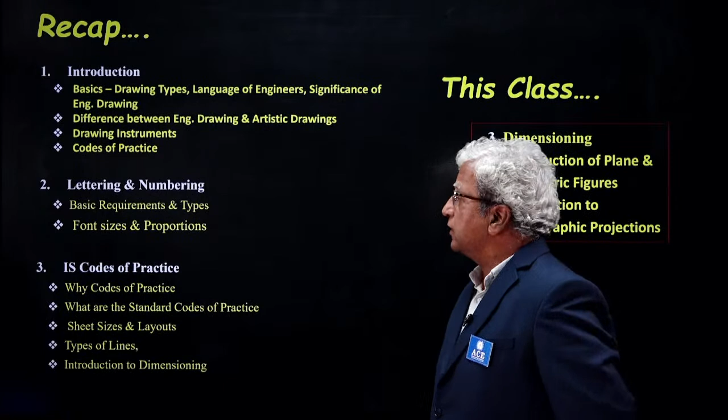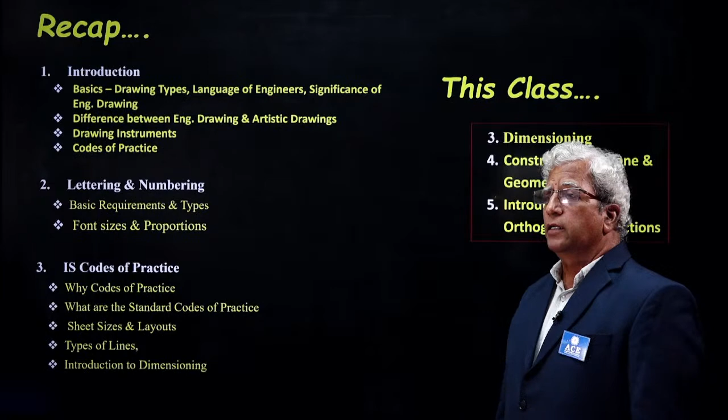This is the second day. Yesterday we had some discussions of the subject. In the introduction component we discussed basics of drawing, the difference between types of drawings like artistic and engineering drawings, and some instruments, codes of practice, lettering and numbering. Now we will go with the codes of practice component, certain things related to dimensioning, and next the construction of plane figures and geometric figures, and based on time available we will try an introduction to orthographic projections. Today we will also discuss certain questions, because at the end of the second day something we would be in a position of having covered something.

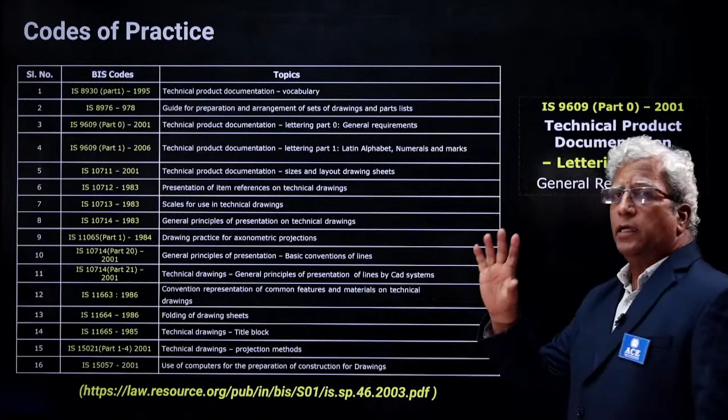Before I go to the actual subject content, yesterday I was expressing doubt about one particular code number, so today I am clarifying that generally we do not expect parts with 0. This is one code where the part is 0, so I was just thinking whether there was a print mistake. It's not so, it was correct, and that code is IS 9609 part 0, 2001. It's about technical product documentation, lettering part 0, and how to document things, general requirements of documentation. All these are available on this website, as I told you.

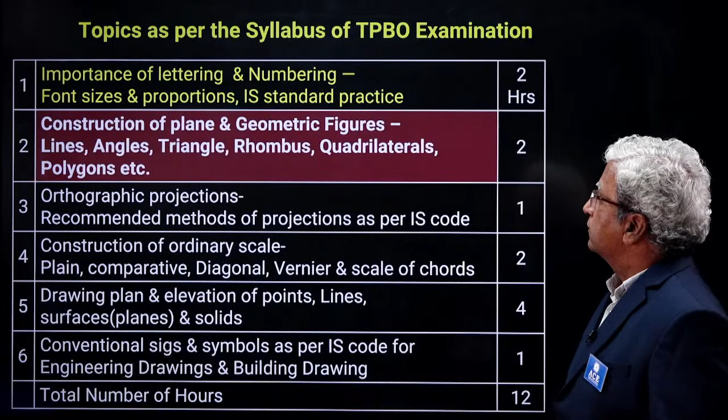Now as per the syllabus, what we have seen so far is at around 1.5 hours we had a discussion. Now we will continue with the same serial order. Today we will be discussing construction of closed figures and polygons and some aspects of orthographic projections.

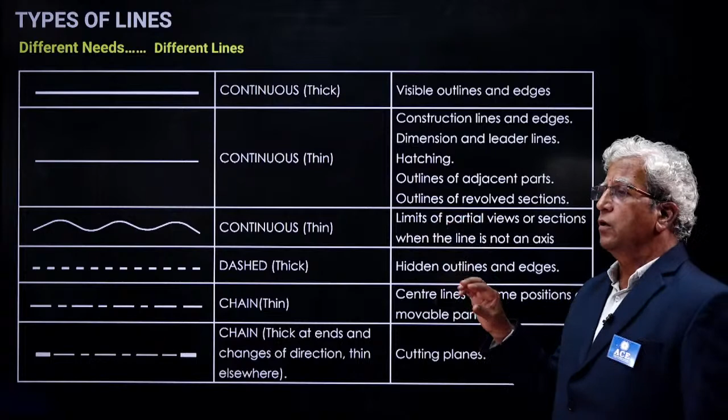As I told you, normally when we make a drawing, as I already told you about the visible edges of a particular drawing, we use continuous thick lines. The majority of the other lines are thin lines. When you start drawing, even if you want to draw a straight line, first we'll draw a thin line.

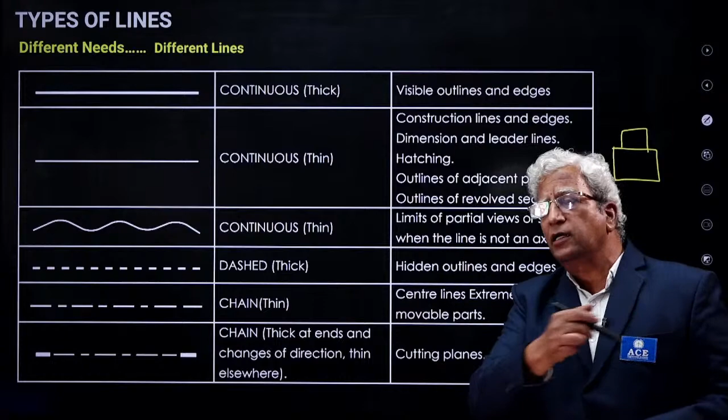On that, mark the distance. So majority of the time we'll be drawing only thin lines, because these thin lines will build the sketch. Later on we'll thicken the required components; other things can be left over if we manage well. Thin lines will be used for many applications like construction lines and edges, dimension and leader lines, hatching, outlines of adjacent parts, outlines of revolved sections. So many examples are there. When dealing with a number of drawings, we will be coming across those lines.

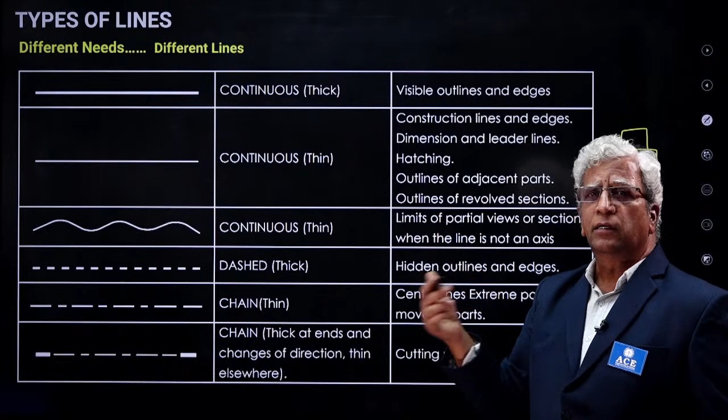So continuous thin line, limits of partial views. Like that, especially as I told you, majority of the time what we use is the continuous thin line.

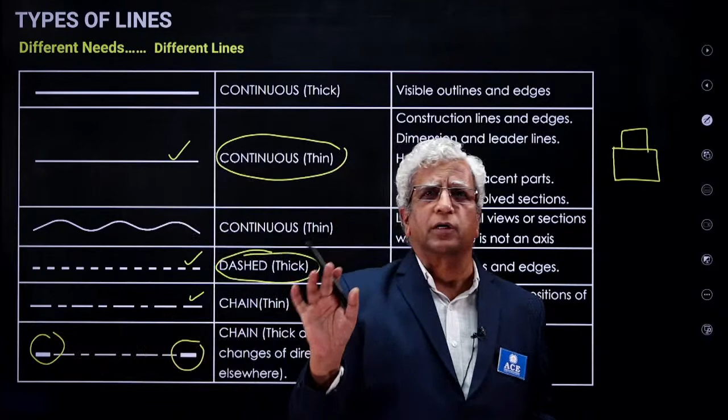Okay, like that, cutting planes etc. We use the same line for cutting line, but with thickened edges. Of course, we don't have sections of solids in our syllabus. If you are drawing sections of solids, you have to represent the section plane by a line, which is same as this line but with thickened edges. That is the section line we call it. So have a proper understanding of different lines.

Now what is dimensioning? First of all, what is the dimension? This is how sometimes in objective questions, if the language is given in a twisted manner, though you know the answer, you cannot properly choose, or it takes more time.

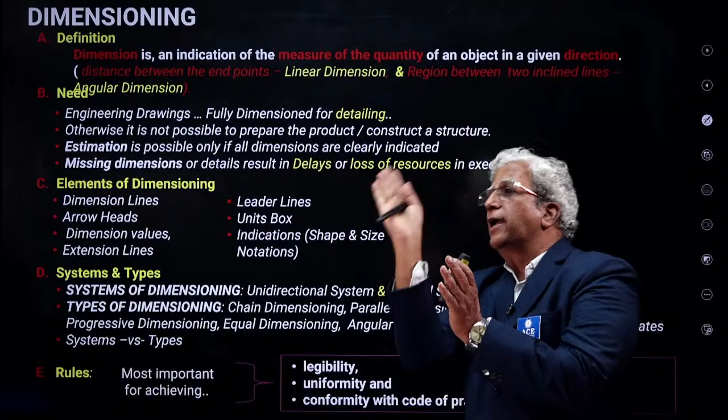So what is the dimension? Dimension is an indication of the measure of quantity. Yes, what is my height? Height is the quantity, how I measure it in terms of some feet or meters or centimeters. So if I want to express the height or length of this object, or the diagonal distance, to express the quantity we use a size indicator, that is what you call dimension. It may be a linear dimension, which is the distance between two points, or an angular space, that's an angular dimension.

And first of all, what is the need?

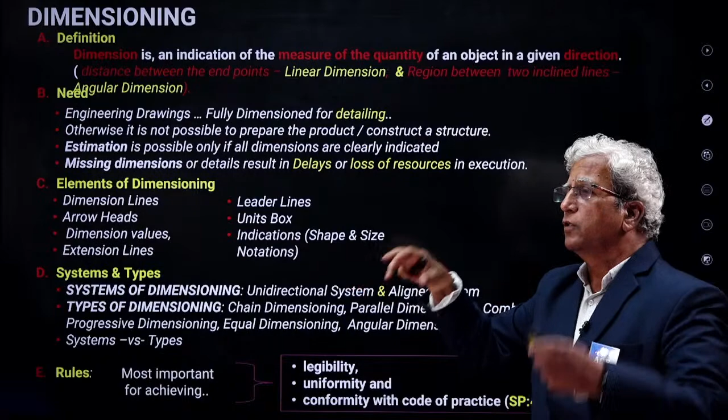Therefore you should have full control over the procedures of dimensioning. So if you want to understand dimensioning, it involves drawing a number of lines and putting some values in a particular way so that everybody will understand. For that purpose, we have to understand what are the elements of this dimensioning.

So what are the elements of dimensioning? There are different elements. First, dimension lines. Each dimension line will have a terminal at which we may put an arrowhead. If not an arrowhead, if you don't have space, we may give a dot or a cross. Even the arrowhead may be open like this, or a closed head like this. So different ways - dimension lines go with arrowheads at the ends.

Then dimension value - if this length is measured, what is its value? Say 42 millimeters, that value is the dimension value. And then extension line.

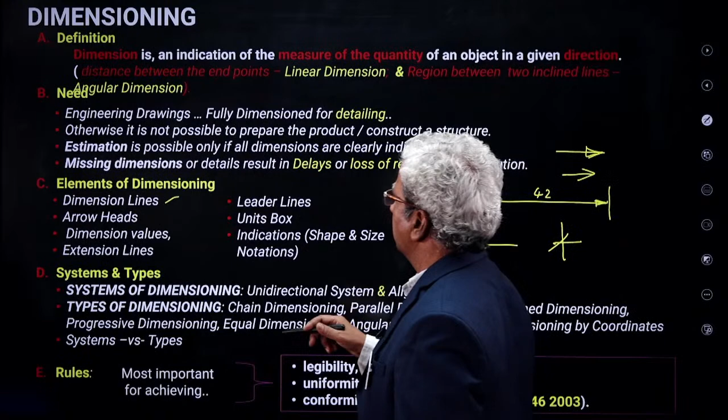How you mark the dimension line, I'll explain so you know the quick way of thinking while writing the examination - you should know certain wordings so that in the options you can quickly select the particular answer. So, extension lines - when you are putting the arrowheads at the end of the dimension, that is at the terminals, that point is connected to the object through lines which are extended from the object to the dimension line. In the sketch you will see it better - these are the extension lines.

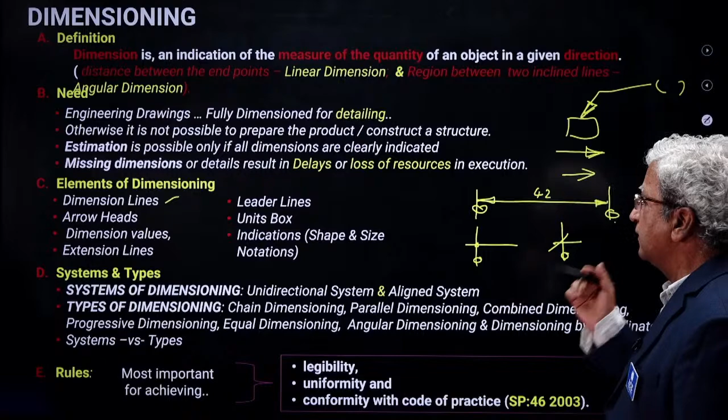Similarly, there will be several types of dimensioning: chain dimensioning, parallel dimensioning, combined dimensioning, progressive dimensioning, equal dimensioning, angular dimensioning, and dimensioning by coordinates, around 7 types. So systems versus types also you should have a complete command.

Some options may be given where they ask: this is not one of the systems of dimensioning. In the list, he will give all the types except one, or in the types he may put one system, and then ask you: this is not a type of dimensioning.

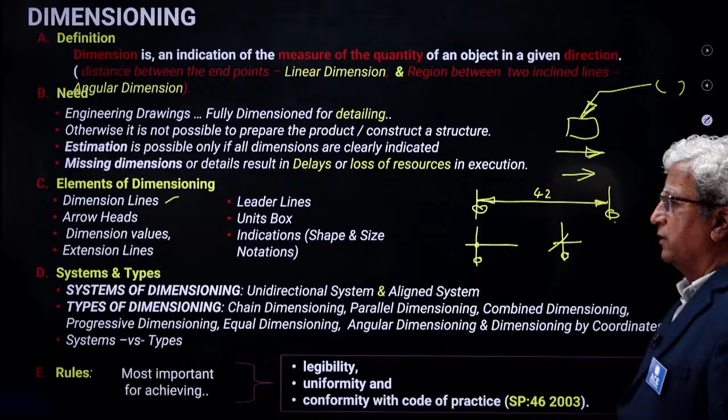We'll go through that. Okay, but what are the rules of dimensioning? Yes, a well-dimensioned drawing will be quickly read and quickly interpreted by the users.

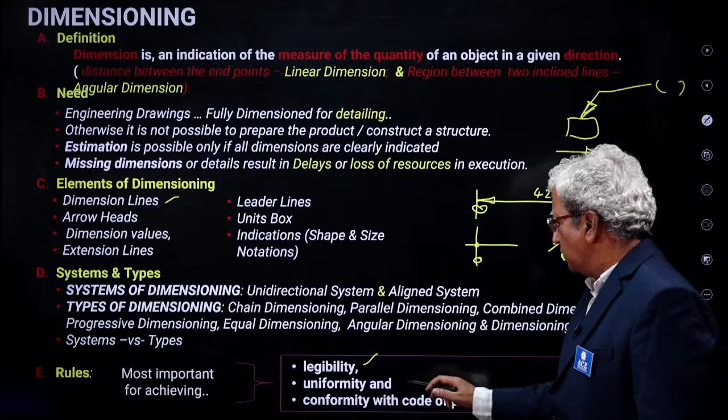So most important for achieving good dimensioning, you need to achieve legibility, uniformity and conformity with the code of practice. That is SP 46 which speaks about all these things. So we'll see what are those things.

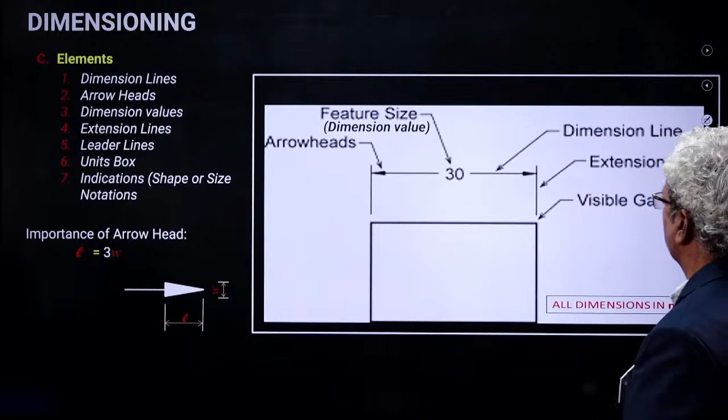Right. So what are these things? You can see what are the dimension lines. Are there any dimension lines in this?

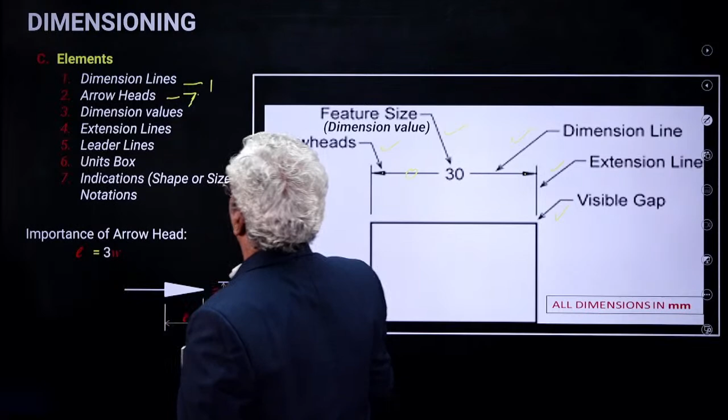7 arrowheads. And dimension values, only one dimension line, hence only one value we can have. You can see, right? Only one value we have, one dimension value visible here.

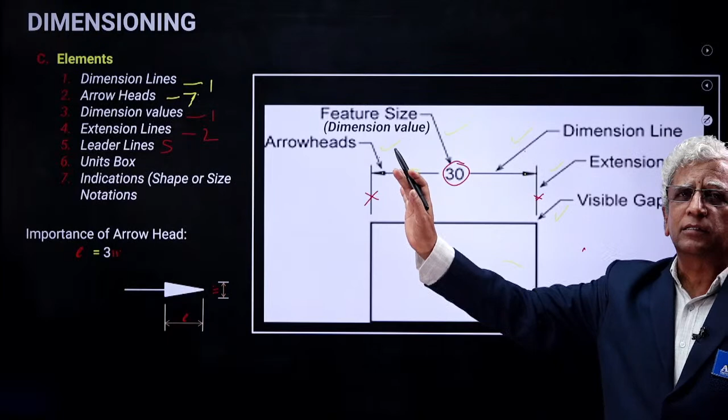We will not repeat the dimensions. All dimensions should be in one common unit only. Therefore we will show that unit in the box.

Okay, that is the units box. Okay, see all dimensions in millimeters. Is it not so? Okay, all dimensions in millimeters. This is called unit box.

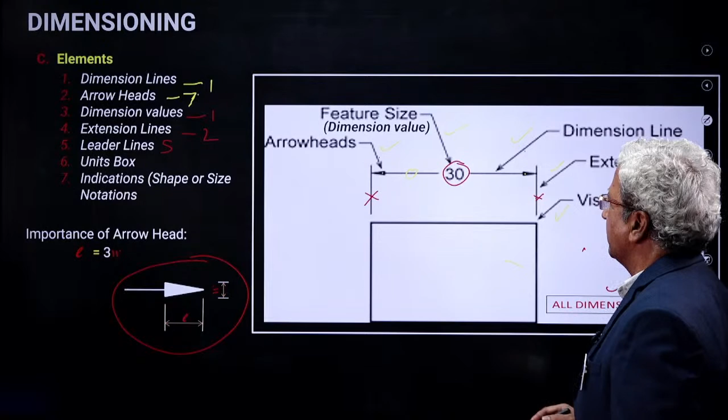to draw it like that. Here I am just showing on the same sketch. Many students complain that, sir, I am not getting it like that. So the best way is: don't end the arrowhead here. End the arrowhead a little bit away.

Try to take it like this, then you will be able to get lengthy arrowheads. Students often complain they could not follow, so the best way is not to end the arrow here but connect a little bit away from the extension line. If you start this way, you'll solve the problem. This is one technique. Okay, anyway, now these are the arrowheads.

There are different types of arrowheads for different contexts. You can see arrowheads and positioning of a dimension line, how you have to position the dimension. These are all the rules of dimensioning.

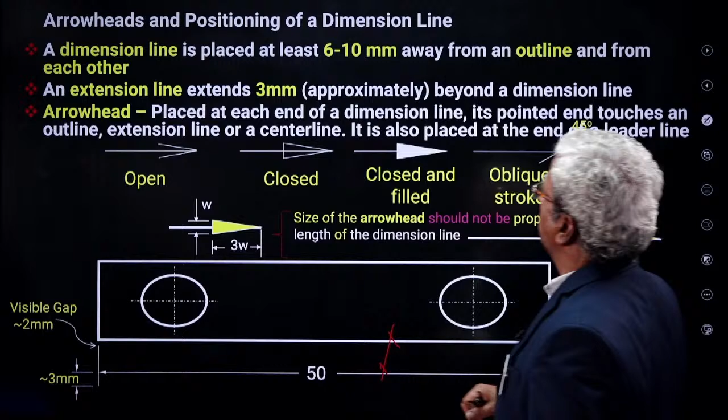For example, see here, these are the two things. You are able to see this, I hope. So this is the object, this is the extension line.

The extension line starts with a visible gap of around 2 millimeters. Similarly, where should the extension line go beyond the dimension line? For a distance of around 3 millimeters. So we should not draw it just like this.

You should not end like this - it needs to be a little bit more. Similarly, you should not end like that. If there is an object like that, you should not connect the extension line with the object. There should be a visible gap between the object and the extension line. These are all the rules of dimensioning.

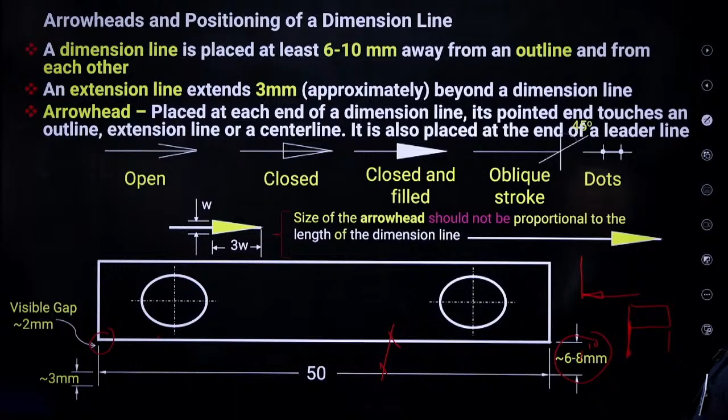How to place the arrowhead - its pointed end touches an outline or extension line. Sometimes you may not be able to draw the extension; sometimes you start the dimension from the object itself, as it's required. In such situations, for example, if I don't have space here to give a dimension, I may start from this point itself.

So what are the types of arrowheads? Open type, closed type, closed and filled type. If there is no space, you go with a 45 degree slant line at the intersection of the dimension line and extension line. Even for small dimensions like 2mm or 5mm, you show them through dots. So there are several ways of representing dimensions, arrowheads, etc.

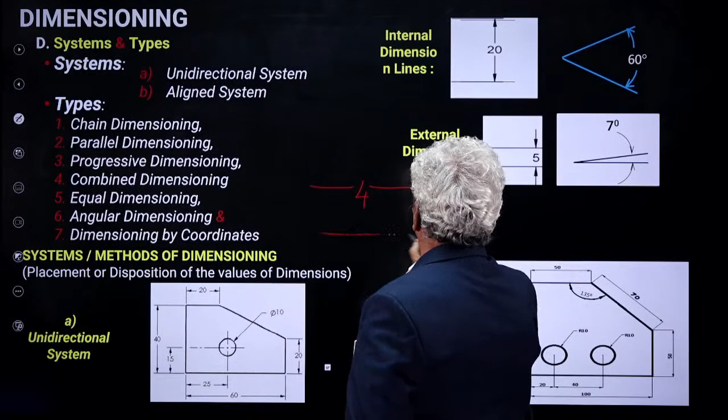Now you can see systems and types. First we will discuss systems of dimensioning, then types of dimensioning. What are the systems of dimensioning? The way in which you place the values, there are two ways you can put it: you can give a break in the dimension line and put the value, or you can directly put the value on the dimension line. Accordingly, we have systems.

If you put a break and put the value in the middle, it is called the unidirectional system. If you put it on the line, it is called the aligned system. In these cases, regardless of the direction of the dimension line, the fonts are always written horizontally.

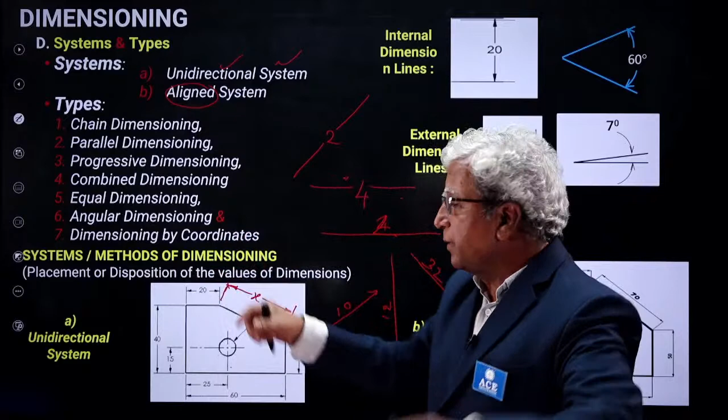It is on the line, not above the line. Sometimes people may call it on the line but with a break. So it is broken and written, whether the line is this way or that way. Similarly, if there is a dimension line to be written here, how do we write? We put and write some value x in that direction. So this is unidirectional - why is it unidirectional? Always horizontal and then with a break, clear. Then here, if it is a circle, you put a diameter here.

There may be external dimension, internal dimension, that also I will tell you. So even angular, it is an angle - this angle is measured with a break here. If it is internal, external, sometimes we don't have space. In that case we put it like this - there are two external dimension lines, and in between you put the value.

Even for angular, we will put like this. If there is no space here, we put here - that is this thing.

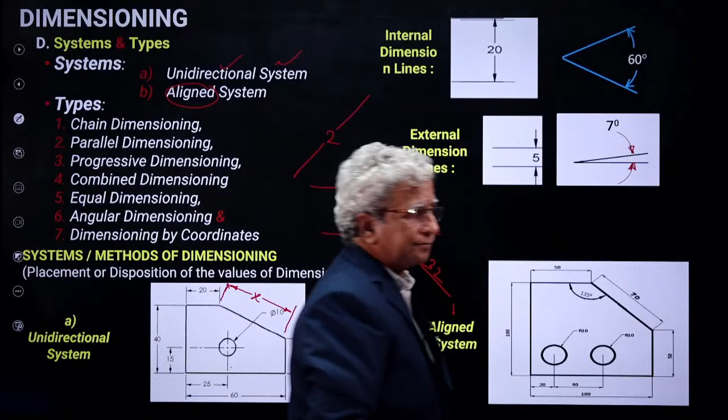And in the aligned system, now you can see what is the way in which it is kept. You can see there are 1, 2, 3, 4 horizontal dimension lines. For them, without a break, we kept the values like this, above the lines - continuously drawn. But here you can see there is a vertical line here, there is a vertical line here.

In this vertical, from bottom to top, 100 - how is it written? Similarly it is vertical, bottom to top it is written. Similarly for a slant line, as I told you here.

Unidirectional - so if it is unidirectional, we will put horizontally. Now it is aligned, so on this, you are able to see, right? On this you will have above that, in that direction we will put. Same thing if it is unidirectional, how do we put that? Horizontally we write with a break. That is the difference between unidirectional and aligned system - this is aligned system, this is unidirectional system.

Similarly, the angular value, you see, on that we put. If the same thing is unidirectional, what do we put? If some angle has to be written like this, 130 degrees - horizontally we write with a break, this is unidirectional.

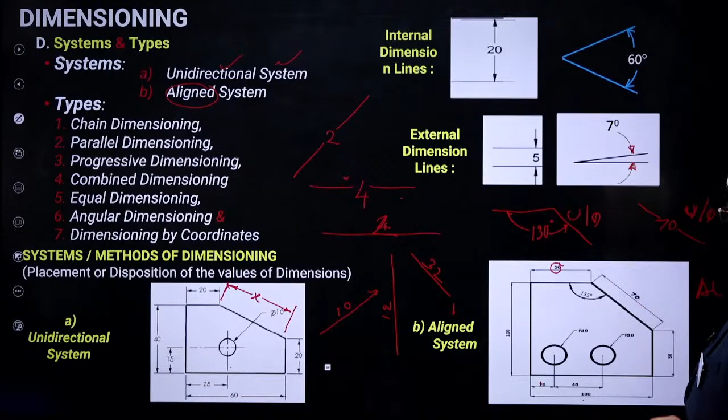So like that you can see different ways of dimensioning. And if it is an external dimension in the aligned system, suppose a small distance is there like this, we will continue the line and put this value here - you write here 2 like this. If there is no space, you place it in the side in that same direction. This is external dimension. Even for angular dimension, same way.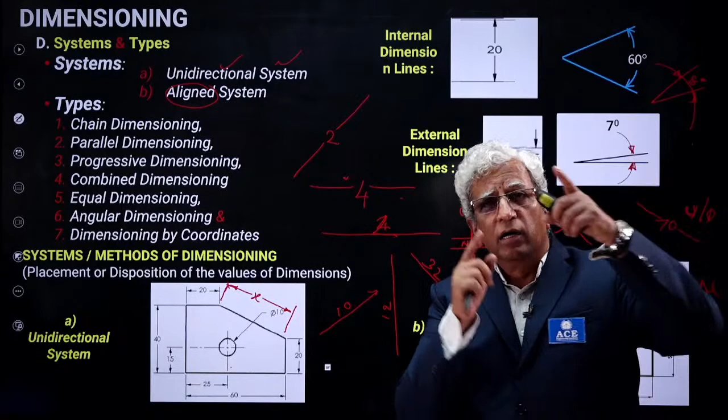Here if it is a small angular dimension, you continue the arrow like this and put on that, say 18 degrees like this, on that you put like that. Okay, this is how you can understand the difference between unidirectional and aligned. So in the unidirectional system, all values are written horizontally with a break in the dimension line. In the aligned system, all values are written above the line without a break, whether it is internal or external, whether it is angular or linear.

So with these examples, we can see a number of sketches showing those examples. Okay, one more slide - somehow I don't know, it's missing.

Okay, now the types of dimensioning. We have seen systems, now types. What are the types of dimensioning? As I told you, for different reasons, different contexts, we have different types suited to different needs.

Have a cursory look at all these types first. The name itself suggests you need not memorize anything. The name itself tells the layout. You see that? Please observe, all of you.

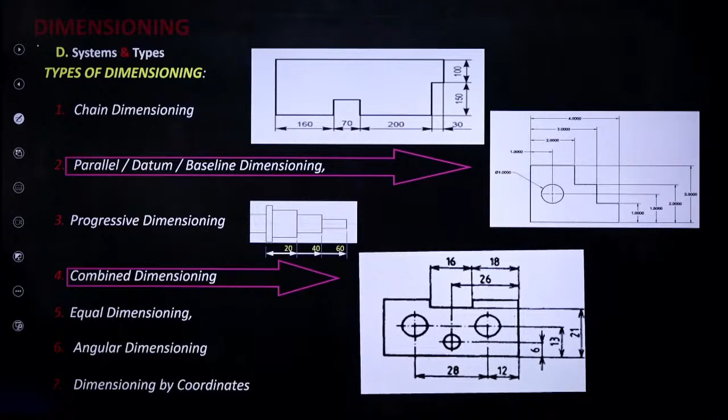Okay, chain dimensioning, you see. Suppose all the dimensions of the object are such that they can all be written only along a single line, or all the dimension lines are in a single line, then you go with chain dimensioning. You see, it's like a chain. All the dimension lines are in a series, one next to the other along a length. That is chain dimensioning. This is horizontal here, vertical also like this.

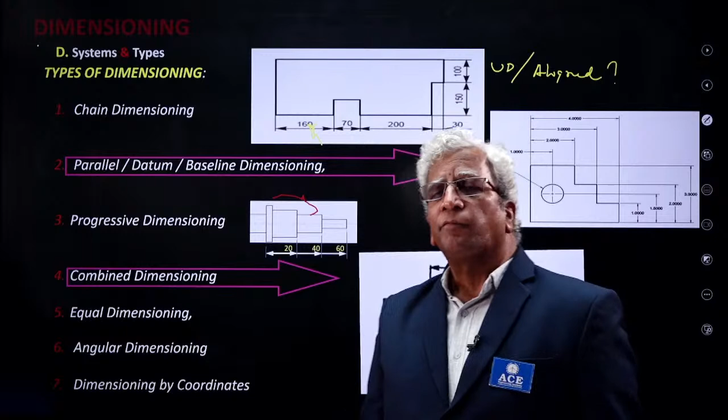Then parallel dimensioning, or datum, or baseline dimensioning. All dimensions start from one point. In that case, it is called parallel dimensioning. For example, all measurements are marked from the same common point for marking convenience. See here, all the dimensions are given like this. All dimensions start from a common line, here horizontal, here vertical.

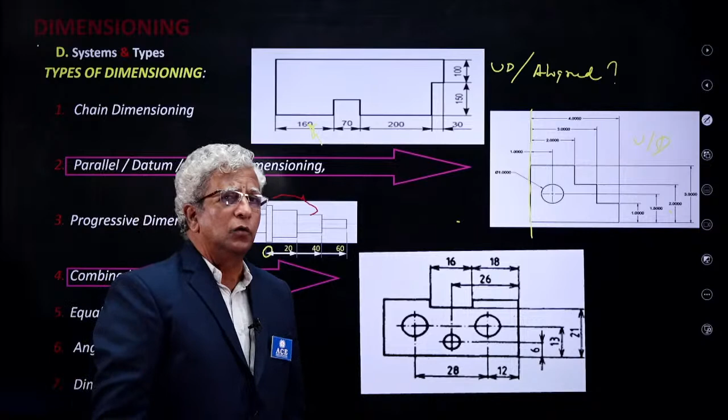Combined dimensioning, of course equal dimensioning - same sketch, it will come because of the space. You can understand if there are repeated values, for example here I will show you some repeated values are there. All values are same.

In that case, just to give better readability, we put this. Here we put some dimensions, say 25. Same value is there, so you put 'is equal to'. Instead of writing 25 a number of times, we will just put equal to. That means all the dimensions are same. So that type of dimensioning is called equal dimensioning, and this is only to raise the understanding level.

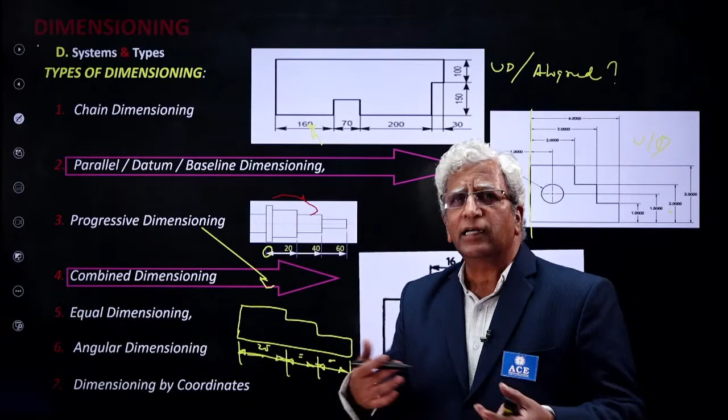So for quick readability, see, different contexts, different types have evolved like that. So you can see equal dimensioning, that is the example, okay. And then the other - in the next slide - the angular dimensions in both the systems, and the coordinate dimensioning. Angular dimensioning means you are showing the angles.

You are showing the angles. If it is a unidirectional system, all the angles are shown by giving a break on the arc. This arc should be drawn such that when you are showing the angle between two lines, these lines will intersect at a point. For example, there are a number of radial lines here, all intersecting at this point.

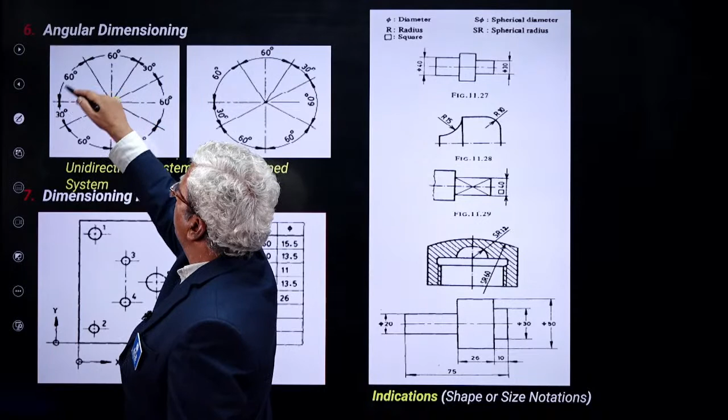So different angles are shown, but because it is a unidirectional system, all the values are written horizontally, whereas the same angular dimensions, if you want to show in the aligned system, you can see along this, along this, along this, above the line. See the difference between this and this, okay? Above line, above line. Similarly this and this. So like that, there are several examples you can see.

For this direction, I am putting 60 degrees in this way. For this direction, I am putting 30 degrees in this way. Again, these two you see - clockwise, anti-clockwise directions. Like that, that system is our aligned system, okay.

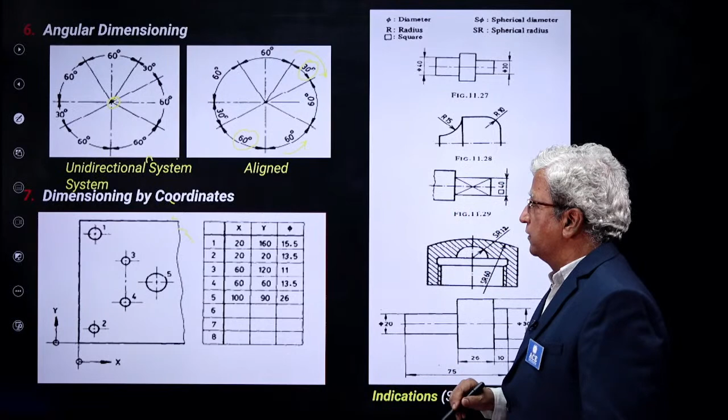And then here, dimensioning by coordinates - this is good for our CAD/CAM jobs, for easily feeding things. You know what are coordinates? We take a reference point, an origin point, so that we establish an x-axis and a y-axis. The two coordinate axes, is it not so? Horizontal x-axis, vertical y-axis, right? With reference to those coordinate axes, with the origin as the reference point for measurement, we'll locate different objects in the drawing.

For example, there are some boreholes on this plate drilled with different numbers, and their diameters are also different. Accordingly, we'll give numbers for those objects. For each number, we'll give its x coordinate and y coordinate. For example, number 3 is here. For number 3, its x coordinate is 60, means what? From this vertical line, the distance up to this point, that is 60. Similarly, that is the x value.

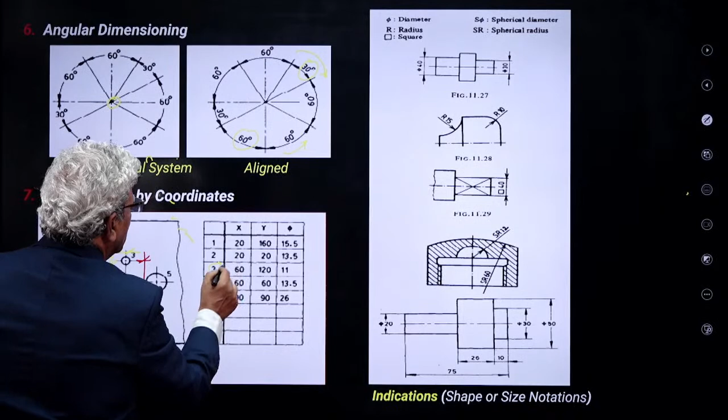Similarly, the y coordinate for this point is from here, this height. Y coordinate is how much? 120. Now you understand? This is all, it's not a big new thing, everyone can understand well. So we will need a table of coordinates to accompany the drawing. Without this table of coordinates and designation, you cannot give that, okay? For CAD/CAM work and such things, this is suitable.

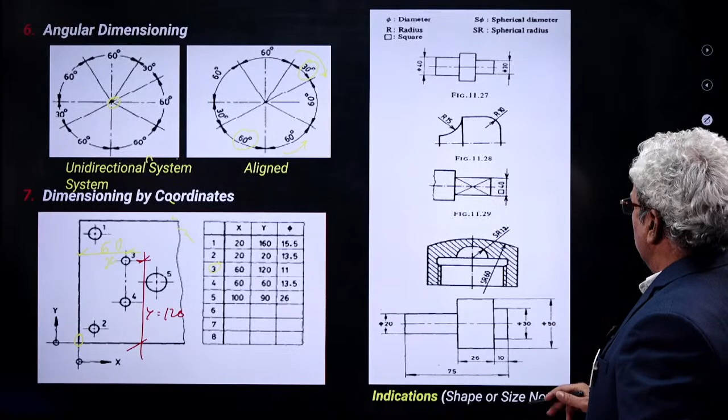So we have seen some 7 types of dimensioning and 2 systems of dimensioning, and before we go to the next chapter, we'll see this and have a small break. What is that? Indications - that is shape or size notations. See, dimensioning is to give quick readability for better understanding with the least number of values, etc. For that, these things were given by the code.

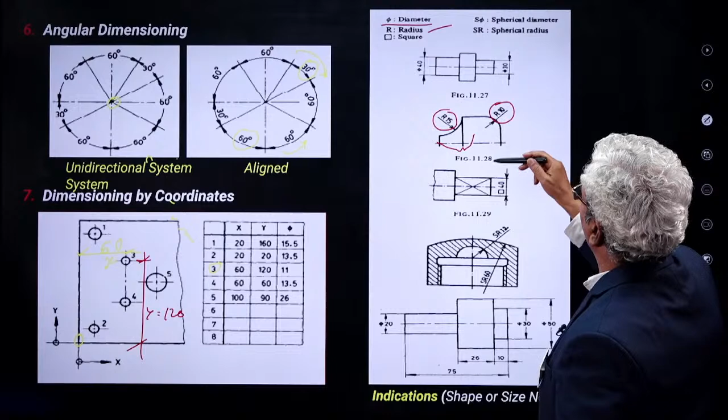What are they? You can see it is written R15, R10 - that means what? Radius value 10. You see, R tells what - Radius. Similarly, phi tells what - Diameter, okay, phi is diameter. Where is phi? You can see some diameter. Yes, phi - see, phi 30, phi 40.

So you should write like phi 50. That is correct. But if you write 50 dia, we may say it, but we should not write like that. We should write like this - we should not write like this. We may call it that way, that's a different issue. But we should always put the diameter symbol or radius symbol first and then put the numerical value. This may be a big question.

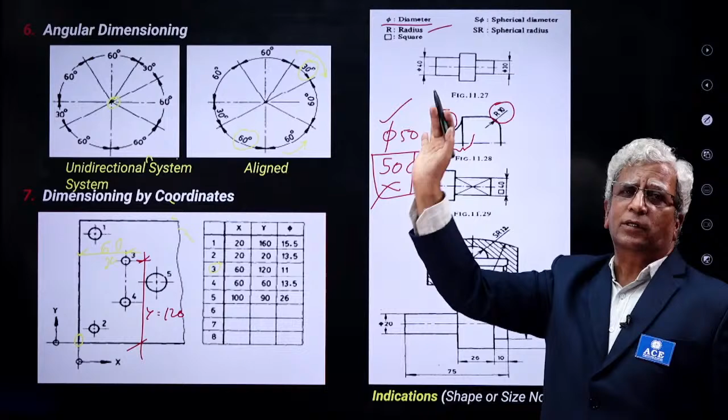That's about diameter and radius. Similarly for square, some shape, for example here it is shown for this part, some 40 square. The rule is: numerical value preceded by the symbol, or symbol followed by the dimension numerical value. So this tells that if you see from this direction, the shape will look like this, whereas from this direction, this is a circular one.

Here dia 30 means this object is something like a rod. Similarly, from this side I will show you, this object is something like this. So diameters in one elevation or plan give us only 2 dimensions, not 3 dimensions. Such things you can see like that. Similarly, radius, and then radius square we have seen.

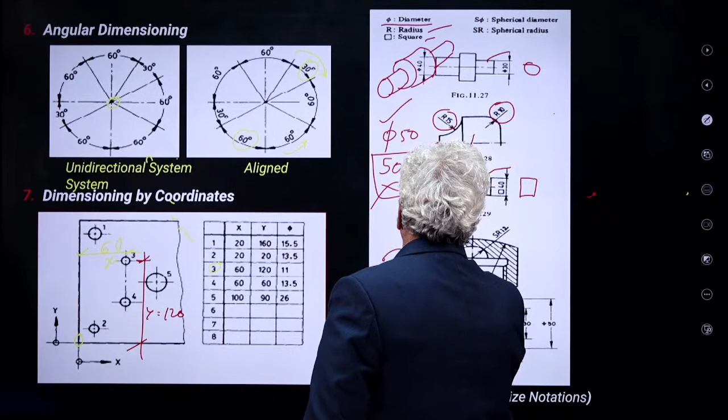Now, spherical diameter and spherical radius. The symbols are S phi and SR. For example, here it is written. Here is spherical radius, and this is spherical radius, meaning inside it is not a cylindrical hole, it is like a spherical hole. So if you cut like this, the hole will also be like this. The object will be like this. Whereas if you cut like this and see in this direction, you will have like that.

Suppose this is a cylindrical one - spherical diameter, spherical radius - whereas if it is cylindrical, if you cut like this and see, you will see the drawing in this form. Because it is spherical all round, if you cut here and see, you will see another same radius. If it is a cylindrical one, you don't show like that, you simply say radius. In that case, the continuous drill hole will be like that. If you see in side cross section, you will have that. So similarly, spherical radius or spherical diameter - these are the symbols.

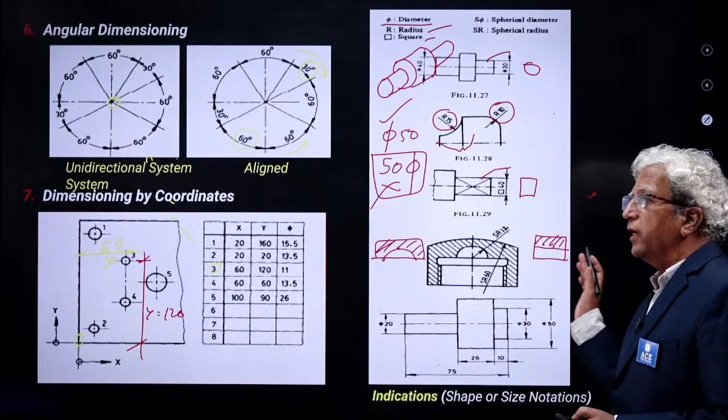Similarly, there are other indicators like tolerances, finishes, etc., but we cannot go on explaining every code. So this is how you can understand different aspects of dimensioning, wherein we have studied the different systems of dimensioning and types of dimensioning, in which for different contexts different types have evolved. If you understand in what context what is useful, you can easily remember. So if questions are there, you have to understand how the question describes the context, and accordingly think and say what type of dimensioning it is. Or if the sketch is given, you can easily identify that.

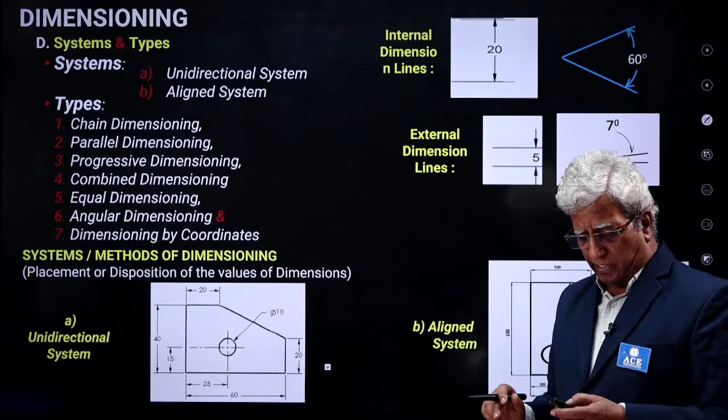Next we will be discussing about lines and planes. Construction of geometry figures - this we will discuss after a 5 minute break. Thank you.

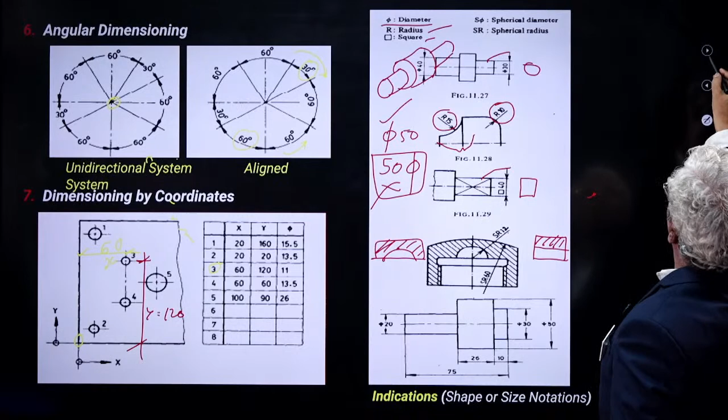Construction of geometric figures. What is a geometric figure? If you can define its boundaries in a proper way, that's a geometric figure. There are certain entities like a point, line, and plane, solid, and so on. A point is a single location entity. A line is a length joining two points. Similarly, if there is a region bounded by certain lines, it's a closed figure. But instead of showing in a haphazard manner, if we can show it in a regular way with certain interrelationship between the boundaries, that's a regular figure.

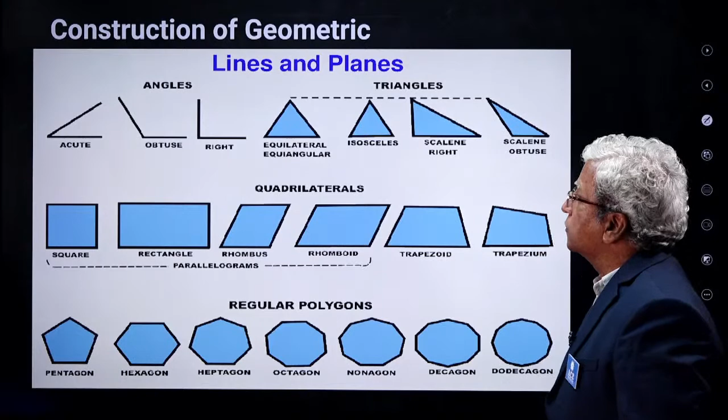All of us know these things - for example, here there are three regions shown, bounded by two lines. This region is one thing, this region is another, and this space is another. Here these regions are bound by two lines - such a situation we call an angle. Here, this line is inclined at 90 degrees, so it's a right angle.

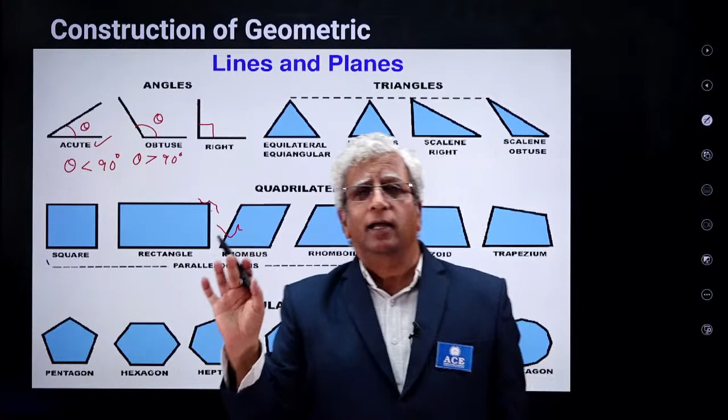If some angle theta is more than 90 degrees, we call it obtuse angle. If that value of theta is less than 90 degrees, it is called acute angle. There are other things also, but we generally only discuss these. There are other terms like zero angle - if these two lines coincide, if I go on reducing this value theta to 0, both lines coincide, so it's called a zero angle.

Similarly, if I go on raising this value, this line will be in line with that, and this becomes 180 degrees. If I go on increasing this value to 180 degrees, in line with that, then it is a straight angle. Right angle is 90 degrees, zero angle is 0, and straight angle is 180 degrees.

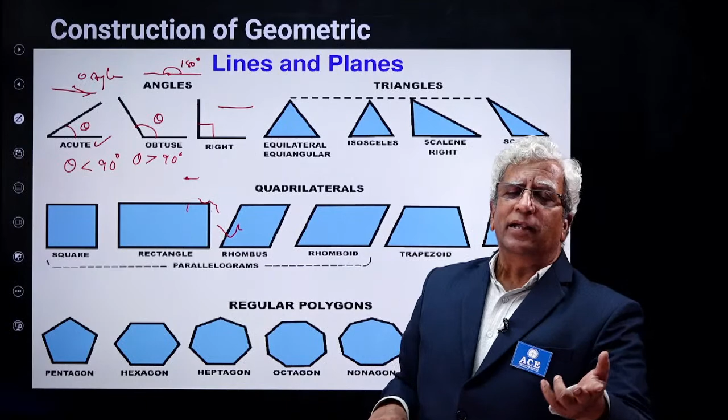So like that. Similarly, there are other terms like supplementary angle and complementary angle, something which is part of 90 degrees. There are so many other things, but anyway, let us finish quickly. Today we have to also discuss some questions.

These are all plane figures. Right from school days you are learning, there is nothing new for you, just for exam point of view, a small brushing, refreshing knowledge with certain exam point of view discussions. So what is an equilateral triangle? These are all triangles, right? What are the types? A scalene triangle - scalene means the three sides are not equal, hence three angles are not equal.

If one of the angles is 90 degrees, then it is a right angle triangle. Similarly, if all the sides are equal, it is equilateral triangle. If only two sides are equal, then it is isosceles triangle. So an isosceles triangle will have one axis of symmetry. An equilateral triangle will have 3 axes of symmetry. This we discussed, you remember? Whereas these triangles do not have any axis of symmetry unless some 2 sides are equal, then it becomes again isosceles triangle.

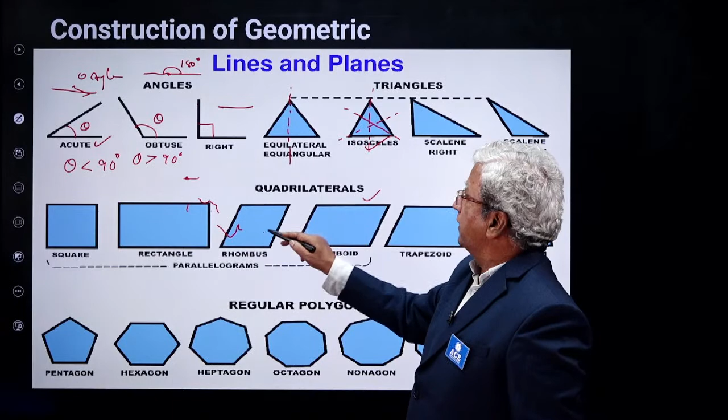But they are all under the class of parallelograms. Generally, we used to call only this as parallelogram in the school level. But for the parallelogram, if all the sides are equal, that becomes rhombus. And for the rhombus, if all the angles are equal, it is the square. And for the rhomboid, if angles are equal, then 2 opposite sides are equal individually, that becomes a rectangle. Thus, a rhomboid can be described with certain conditions either as a rhombus or a rectangle or a square.

So on this you may have questions. Individually you may know, but how to describe it with conditions, right? And one important property is here, if you see the diagonals, only for 2 things the diagonals intersect at right angles, 90 degrees. What are those 2? See, the square - for the square, the diagonals intersect at right angles. Similarly, for the rhombus also, the diagonals intersect at right angles. This is one of the questions in the recent examinations.

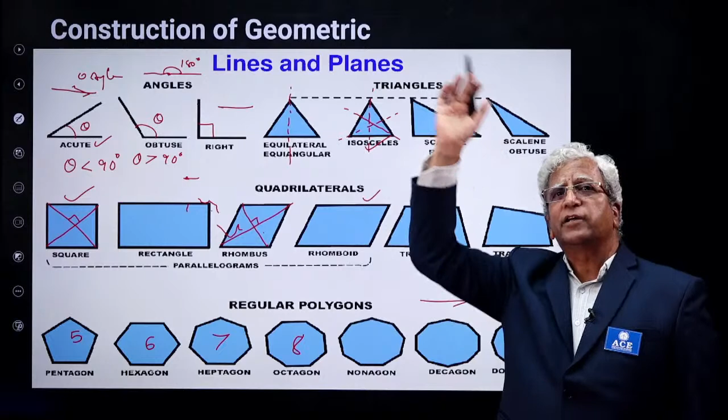Among the closed figures, if this number goes to infinity, what is the result? The result is a circle. So the circle can be viewed or expressed as a polygon with infinite number of sides and also infinite number of axes of symmetry. And what about the axis of symmetry for these things? Whatever is the number of sides is the number of corners, so same is the axis of symmetry.

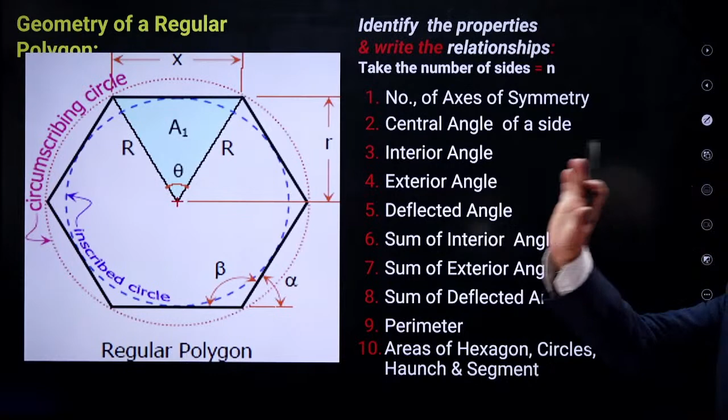Now, this is one particular slide wherein you can comfortably answer so many questions, or expect so many questions, if the topic is classified as per our syllabus as geometric construction of geometric figures. Now what I have shown here, you can see, is a regular polygon, that is a hexagon.

It is a hexagon. Now this hexagon, because the number of sides is 6, is called a hexagon.

Identify the properties and write the relationships. Take the number of sides as n. See, hexagon I am showing you as an example to describe the regular polygons and their properties. So what are those things we will start with? You can see here what is the sketch. Let me first describe you. I have drawn a regular hexagon.

Then, with that regular hexagon, I have drawn two circles. One is an internal circle which is tangential to the sides. You know the meaning of tangent, right? So this internal circle is tangential to the sides.

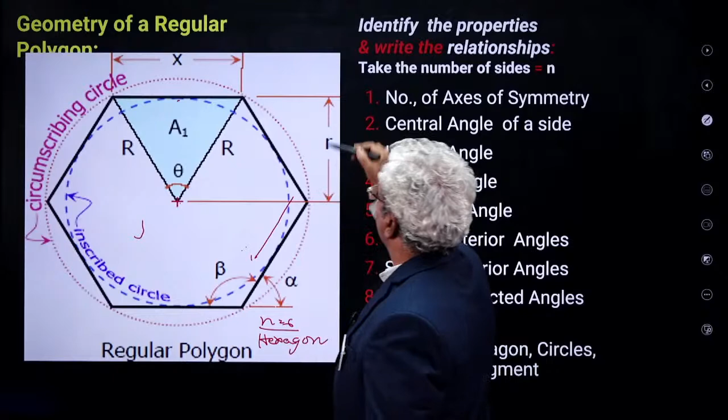It is circumscribing, it is above the hexagon, so it is called the circumscribing circle. Whereas if you see the distance from the center to the midpoint, this distance, small r, this blue color circle, it is inside the polygon, in this case the hexagon. That circle is the inscribed circle. So there is an inscribed circle and there is another circumscribed circle.

Now, let us see the properties. What is the number of axes of symmetry? In this case, n here is 6.

Then the central angle of the side. What is the central angle of the side? The side makes an angle at the center, that is theta. That theta becomes how many? If there are n sides, all the sides, each side will make an angle theta there, is it not so? So that theta, like that, 6 sides together will cover all the central angles together. Therefore, there are 6 thetas here, and this total becomes 360 degrees.

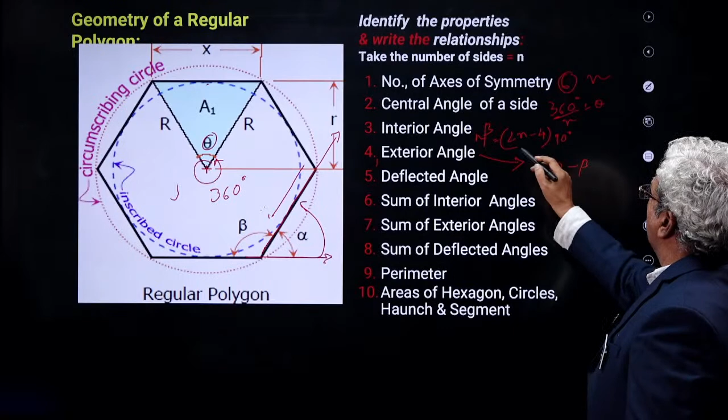So sum of interior angles is 2n minus 4 into 90 degrees. You will get that. Similarly, exterior angles, 2n plus 4 into 90 degrees.

Deflected angles: see, all these lines come back to same position. Therefore, 360 degrees. Alpha becomes all the alpha, that is sum of deflected angles. N into alpha is nothing but n into theta. So alpha and theta are same, value wise they are same.

For example, hexagon, you see, we will know that for hexagon this is 60 degrees. This is also 60 degrees, is it not so? Therefore 180 minus 60, this is 120 degrees. So you can just try like that, you will get all those things.

Similarly, perimeter. How you get perimeter? If the length of the side is, say, x. What is perimeter? N into x is perimeter.

Areas of the hexagon, circle, haunch and segment. There are terms like haunch and segment. You can get them, I will explain to you here. For example, area of the hexagon - how you get the area of the hexagon? If you know the area of one triangle, into n, you will get area of the polygon.

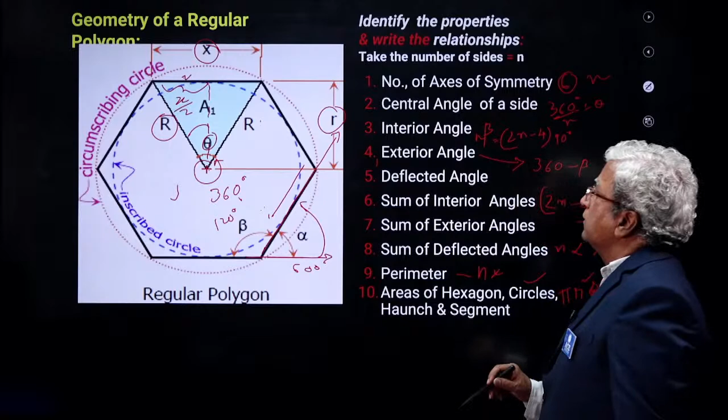And then haunch and segment. What is haunch and what is segment? You see, here I am showing you, this area is segment. Similarly, this area is haunch portion. This area is haunch portion, that area is segment portion.

How you get segment area? There are n sectors. Get the area of one sector, deduct the area of one triangle, you get the segment area. We have seen the formula for circle, divided by n will give you sector area. From that deduct the triangle area, you get the segment area. Do that exercise so that you can remember well and answer the question quickly if it is through these lines.

Instead of practicing during examination time, just try with one example. You can also have a check by combining all these things, the totals will match.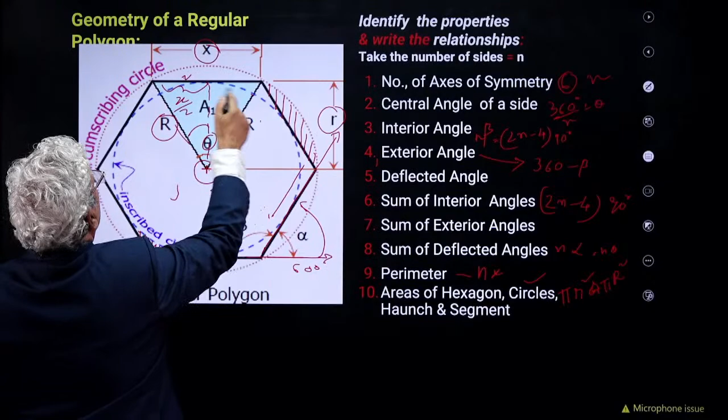How do you get the haunch area? From this triangle, deduct the sector area of the inscribed circle, and the balance is the haunch area. This haunch area you can see as explained.

Here I am drawing another triangle. I will remove the other things so the last one you can understand better. Let me explain the haunch here. This is the circle, and this is the triangle. Take the area of this triangle A1, and from that deduct the area of this sector. The radius is small r.

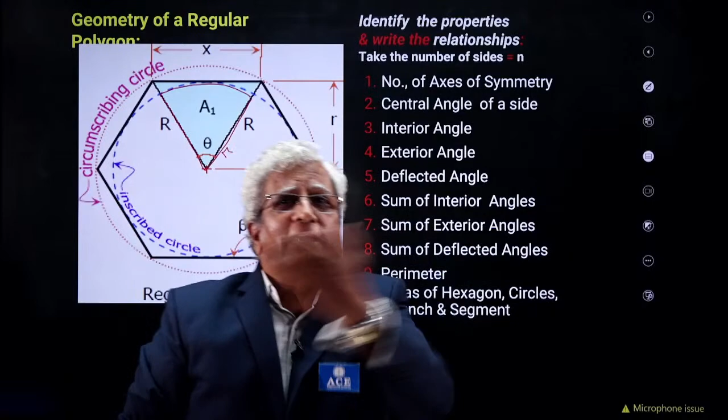So what is that sector area? Pi small r square divided by the number of sectors, that is n. You get the sector area, which you deduct from the triangle area already discussed. Then what remains is the sum of this area and this area, these two haunch portions together forming one haunch.

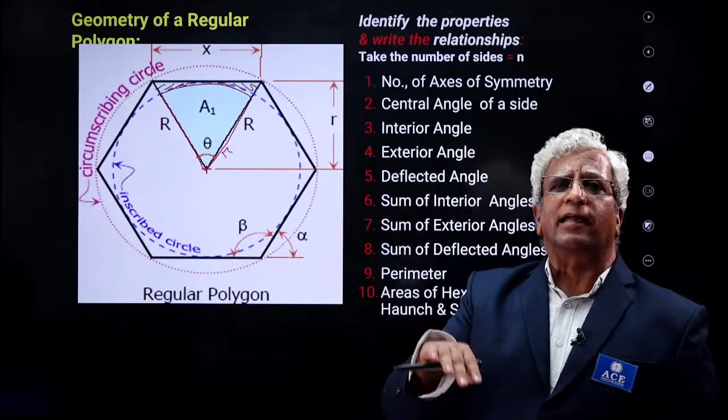So just apply and extend your geometry. Construction of closed figures is what is given in our syllabus, so for that I have prepared this.

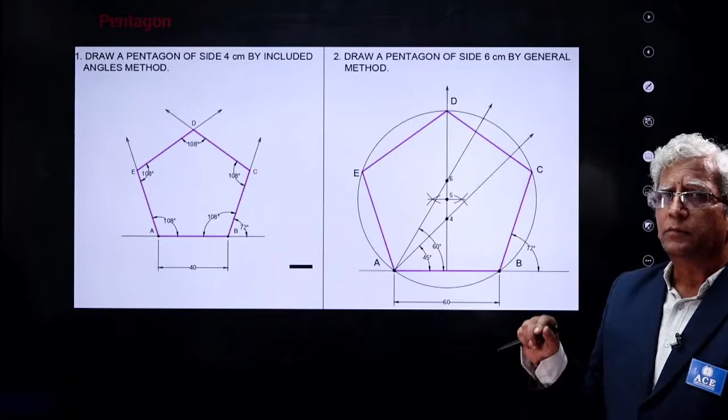You can also see other things like regular polygons and all, but since tomorrow you also have an exam, I think it's better we close. After discussing with the administration, I wish to take 10 or 15 extra minutes from tomorrow onwards so that we can finish. So tomorrow we'll continue our discussion on polygons, how to construct them, etc.

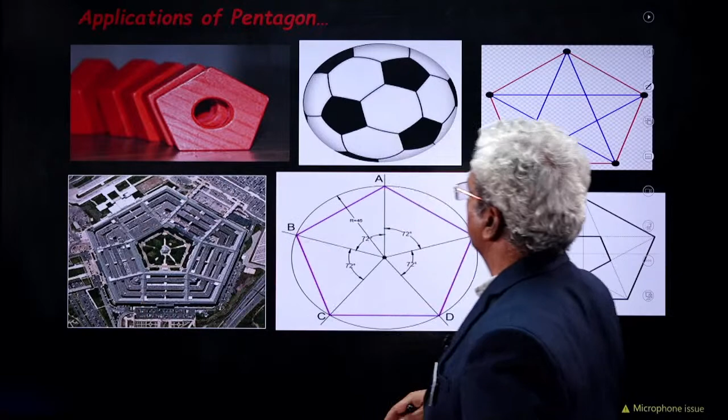These are all examples in the pentagon, like the US military headquarters, and similarly civil engineering building shapes are examples of polygons. This is one exercise where I insist my students try, to test your skill levels and how accurate your understanding is.

You can inscribe 7 circles of equal radius in a hexagon through this construction, a very self-explanatory method. Take one triangle of the hexagon, then take the intersection of the medians, then take this distance as the radius. With that radius in each triangle, you construct the circle, such that with the same radius you will have another circle. This is always the real challenge.

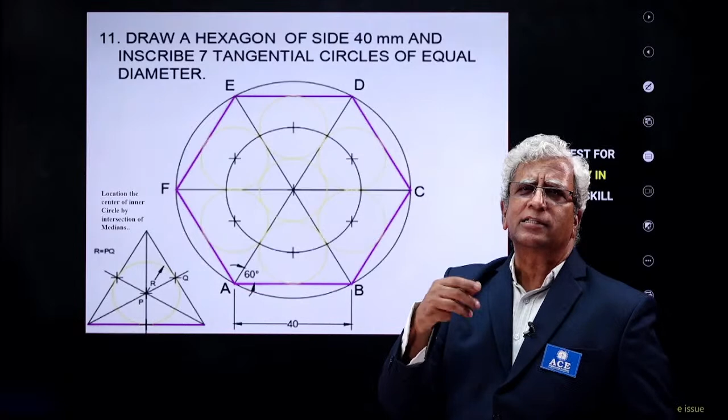It's a self-test for skill, but in the examination we don't get skill tests, only knowledge tests, though it's a possible question. Even in your lower classes you must have seen a question like this: some 7 coins are placed inside a hexagon, what is the area? So you can see all these things in geometrical constructions or other geometry problems.

Before closing, I showed you the dimensions. What is the system of dimensioning used here? Since a line break is given, the system is the same horizontal with a break, that is the unidirectional system, and here too with a break it is given.

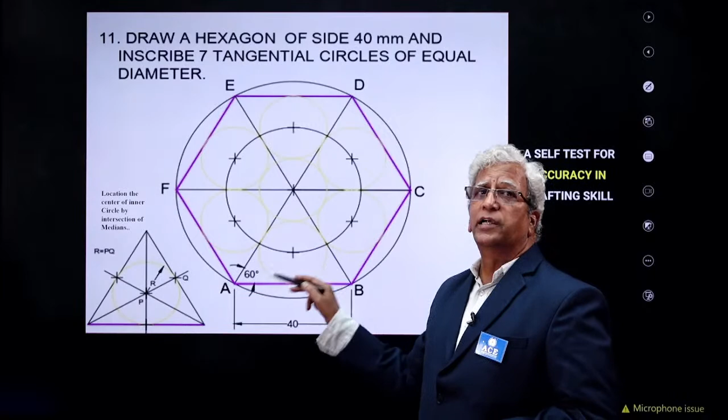Angular dimension is also the same as the unidirectional system. When you draw a figure, you should follow one system throughout the drawing sheet, not only in the figure, either unidirectional or aligned system, but never a combination. To explain that point, I have stopped here.

Next we'll have a discussion on orthographic projections. I wanted to cover that also, but we could only cover up to this much in this 1.5 hours with only one break. So I have to discuss with the academy heads regarding taking some more time so that we can finish quickly.